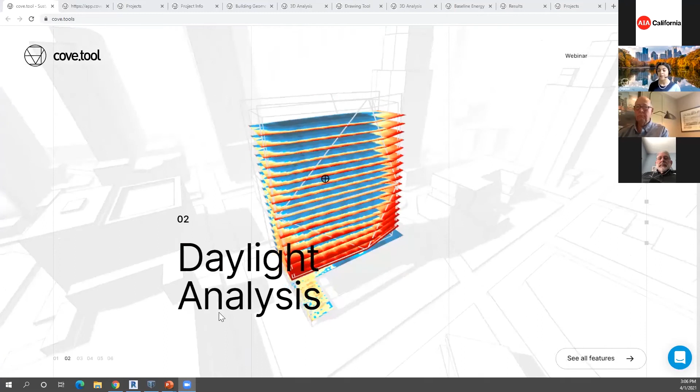And we'll be able to go through all of the various types of analysis within the next 20 to 30 minutes instead of something that would have typically taken 3 to 4 weeks. And not only will we run through the simulations, we'll run through what to do with this analysis, what to do with this information, how does it impact our design, and go through case studies that have done exactly that to see how it shaped those particular designs to give actionable information to your projects and pursuits.

Just in case that's not enough to get our juices flowing, owners are requiring this on pretty much most of their projects. In a survey conducted last year of 1,000 architects in the United States and Canada, it was revealed that a majority of RFPs and RFQs are now requiring building performance, are requiring sustainability to be some part of it. And of course, the easiest way to do it is to just start doing it so that we don't have to start figuring out how to incorporate building performance when we see the RFP, so that it can be a part of our workflow. We can already be prepared and we can go out and start pursuing some of those projects as well.

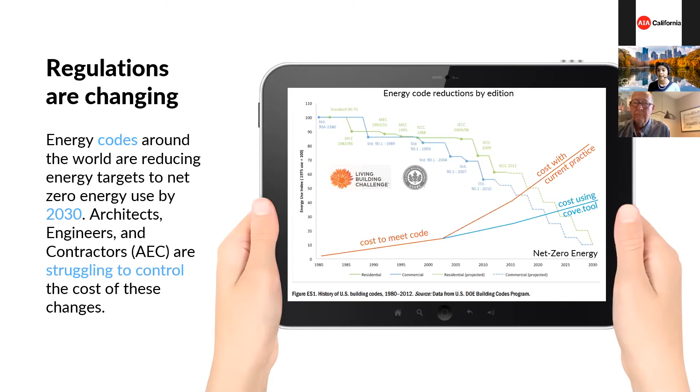Now, here's a typical design cycle. Everything from pre-design all the way to operations. As you can imagine, our ability to impact the cost and the building performance of any given project is really high up front. Nothing shocking there. Nothing is quite fixed. Nothing is quite set in stone. So we can change it easily. Of course, because we can change it easily, that also translates to cost of design changes. It's pretty low. Imagine having to make complete massing changes all the way at the 50% construction drawing phase. That's a very expensive change because we have to coordinate that across all the consultants, all the sub-consultants.

Despite the fact that that is the most expensive stage to make any design changes, that is where a lot of traditional building performance modeling happens, because it's not to inform the design, it's merely to hit a checkbox to see if we met it or didn't meet it. And if we didn't meet it, oh boy, the design changes and the cost of those changes, it's not cheap. Of course, with building performance modeling shifted earlier on, as we're going to see today, we can start making all of those decisions as early as pursuit, pre-design, concept design, schematic, so that by the time we make it to the construction drawing phase, there's no room for guesswork. We already know exactly where we're headed, and that increases our profitability by 6%. And when we're getting paid in a lump sum, which 2/3 of us are, that's a really, really big deal.

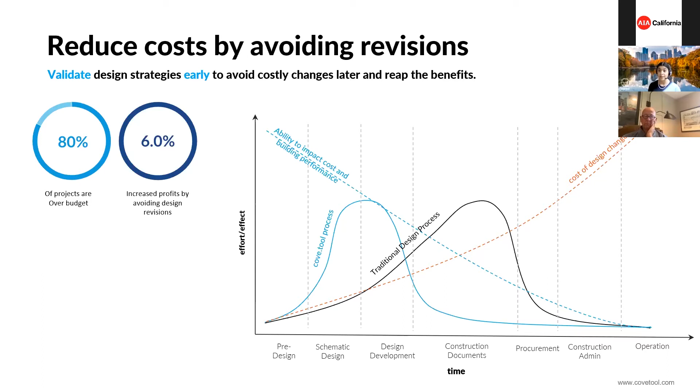Now, before creating cove.tool, I ran a successful sustainability consulting practice. And in this consulting practice, me and my team worked on just about every project type that you can imagine, everything from multifamily, labs, retail, healthcare, hospitality, single family, everything on the table. And what we realized was that no matter the project type or the project size, we always had to do a few core pieces of analysis to get started, to really make sure that the project was optimized for building performance. We always had to collect climate information so we could really understand the location that we were in. Always had to do some benchmarking so we could compare our project to the rest of the country or the rest of the world. We had to do some conceptual energy modeling so we could understand where our project landed in terms of that benchmarking, do parametric runs, and then follow that along with daylight, glare, shadow studies, carbon, water studies, so on and so forth, and pull everything together in a nice, easy to use report.

Whether you do some part of this, all of this, whether you have consultants that do this, no matter how you're handling this right now, it's a very time consuming process. And it took our clients anywhere from $32,000 to $38,000 for a simple 75,000 square foot building. Of course, in the next 20 minutes, we'll see how we can automate most of this and do all of this in about 20 minutes.

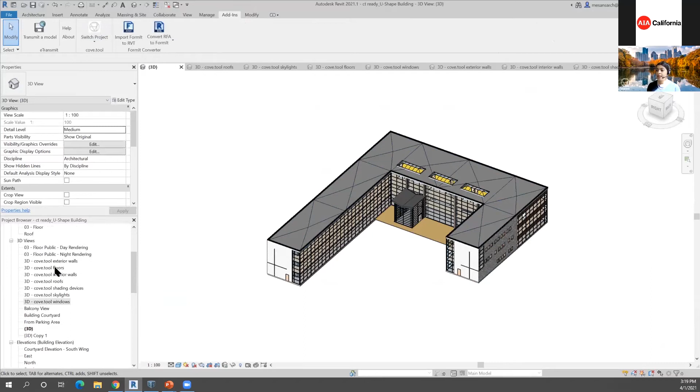If I wanted to bring in my model directly from Revit, for example, I could simply pop open the Revit file. Once the plugin is installed, hover on over to the actual plugin, select the correct project, click on the button, Create cove.tool Views, which creates these custom views in the 3D views category for all of the various elements that are critical for a good building performance model.

Key elements that are needed for a good building performance model are your roof elements, your wall elements, your floor, and your windows. That is the bare minimum, the items that we would have as early as the pre-design stages. Now, if we have more detail, if we have interior walls, if we have skylights, if we have shading devices, great. If we don't, there's no reason to wait.

There's never a reason to not do a performance model, because with every massing, with every fenestration that we're drawing, with every shading device that we're drawing, with every placement that we're doing, we're making a decision, and would rather use a data-driven way to make the decision instead of not.

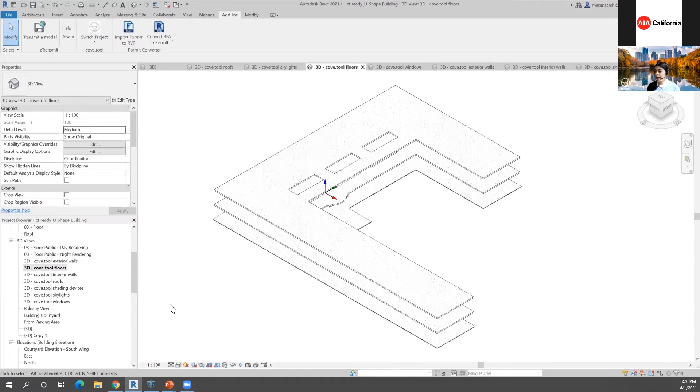If everything looks good, you're able to simply hit export all, and all of the geometry shows up directly in cove.tool. And we can see it right here as it's loaded up, and the 3D button is now active, and we can hit go to daylight. The moment I click that, it spins for a few minutes, and then it shows up.

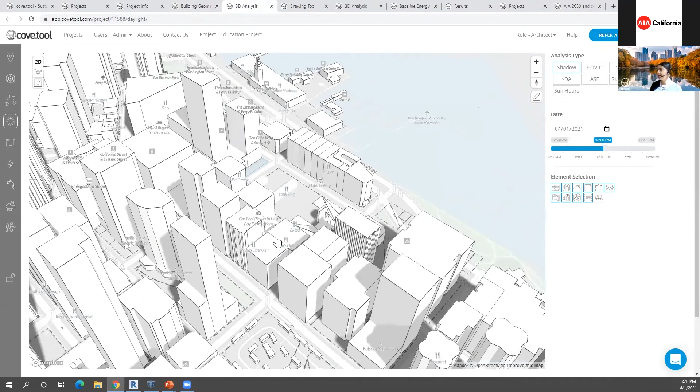As you can see here, we didn't model any of the context geometry, but it's all here. So here I am on that one site. I actually demoed an existing building to put my building that I brought in from Revit right here. You can use the edit icon to move or rotate your building, or to edit or remove any of the contextual buildings if you're demoing them as part of your design.

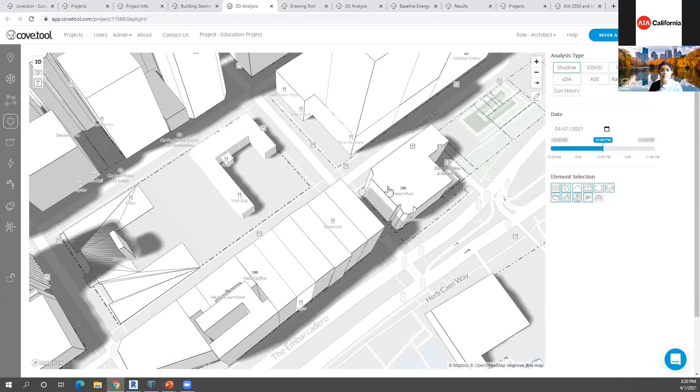You can also see that all of this urban context is auto-modeled. So if you've ever, like me in my previous life, outlined your context, extruded it, spent 8 to 12 hours getting a good context going, well, you no longer have to, because it's entirely automated. I'm going to go ahead and hide the text because I find it a little bit distracting.

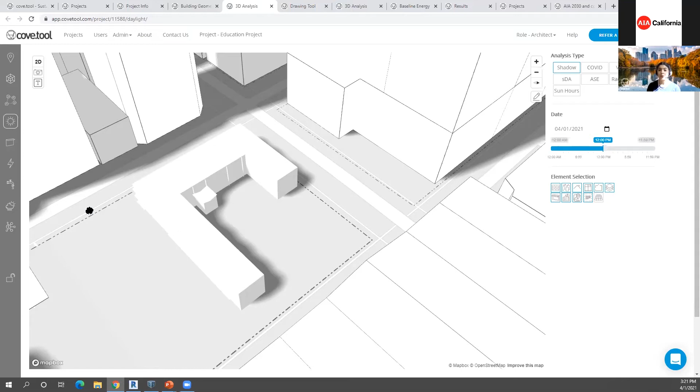I can see here is my project brought in, and here are all of the various analysis types. We're currently looking at shadow analysis. This analysis type is a key analysis type for pretty much every single design project. I would use it as a consultant or as a designer for a few different reasons. I'd use it to figure out how the shadow moves across the day, across the month, across the year, across my site, to understand what parts of my facade, what parts of my massing are going to be in shade, and what parts are going to be exposed.

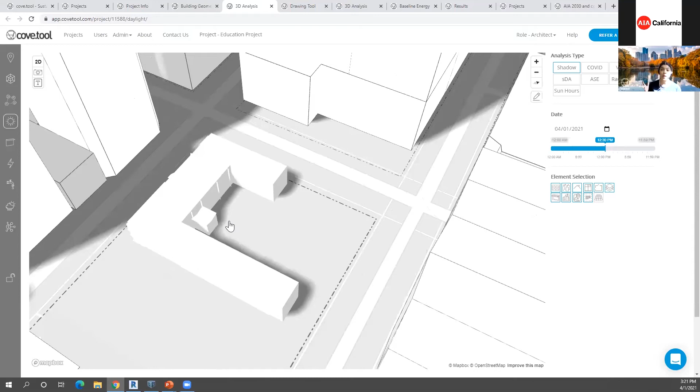It's also helpful to understand if I am planning perhaps an outdoor patio and I want it to be in sun, well, I can make sure that I don't put it in a place that's constantly shaded, like right here. So definitely an immensely helpful analysis type for just about every project. If I'm using this to tell a powerful design story, I can certainly move it to the time of the day that I want to set it at and hit the camera icon. The moment I hit the camera icon, we can download a high quality PNG for our use to introduce as part of our presentations or our presentation boards.

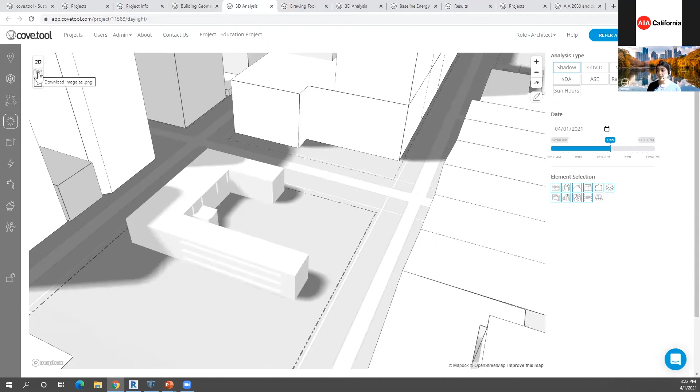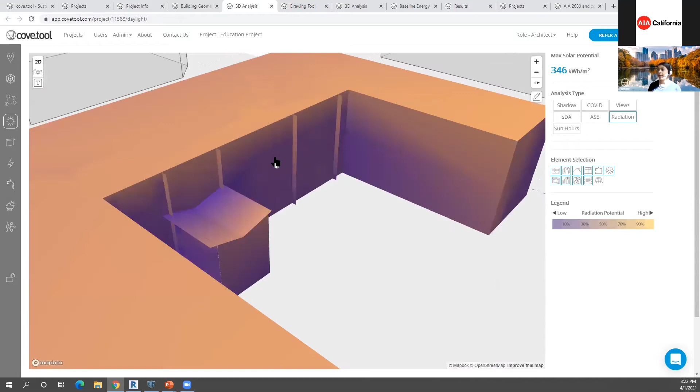Another type of analysis that I find immensely helpful is the radiation analysis. This is basically the maximum solar potential in kilowatt hours per square meter. So I can see right here how the sun falls in different parts of my building. I can see what parts of my facade have hot spots, if any. I can see where there's not enough access to solar and where there is access to solar.

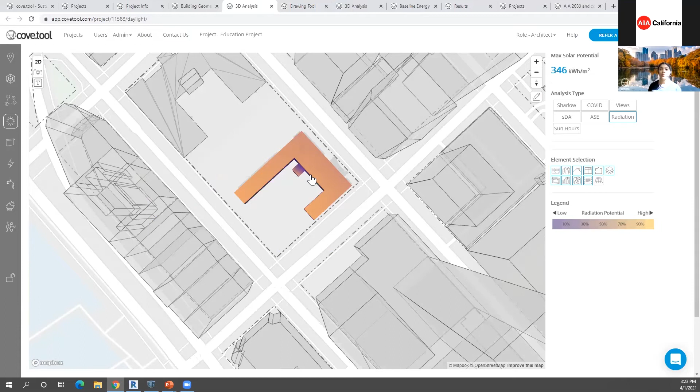As an example, if I was perhaps wanting to put some photovoltaic panels on my building, I would know that putting it here is just not a good idea because it's in shade for a good bit of the year from these buildings, and my solar potential is medium. It's not high. We don't have any part of the roof that has high solar potential because it is in such a dense urban context. However, these edges are definitely higher than kind of that middle zone. So it can help us really figure out and prioritize where we even want to put some of those solar panels and where they will even be effective from just a pure massing standpoint.

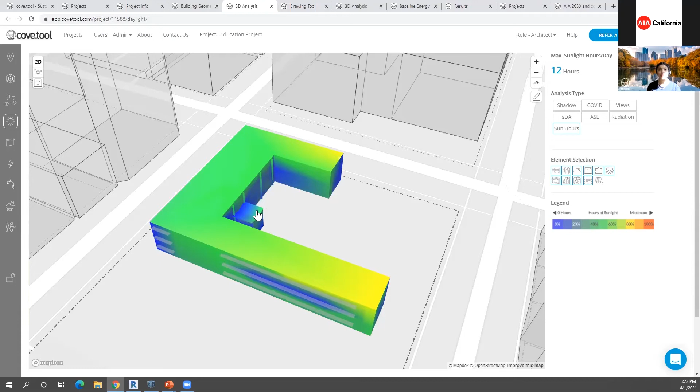Another analysis type and metric that is very helpful is the sun hours analysis. We can use it in a few different ways. We can use it to figure out which parts of the facade have access to daylight, since daylight is such a critical part of making sure that the occupants enjoy a space and experience it well. As you can see, I have tons of daylight falling on me. I can hardly be operational without good daylight, and that's true of a lot of people. So if we do have a fixed budget and we can only put in 30% window to wall ratio, we can make sure that we're optimizing it, that we're putting it in locations that even have access to sunlight hours.

Another way that I can use this particular analysis is, if I'm collaborating perhaps with the landscape designer, to make sure that we're only putting the right plant species on the roof. For example, this part of the roof only gets 6 hours a day of access to sun. So I'd only put species that are going to do well in that particular location type.

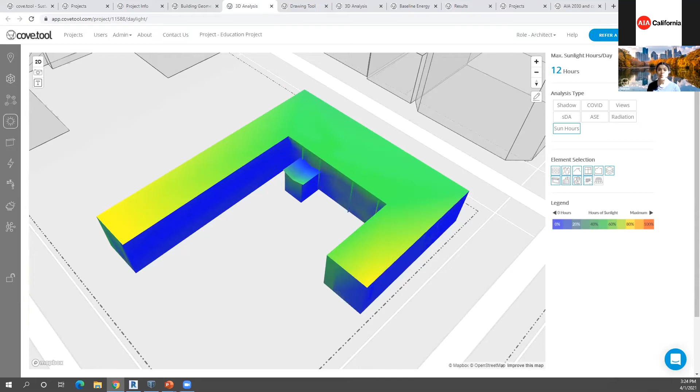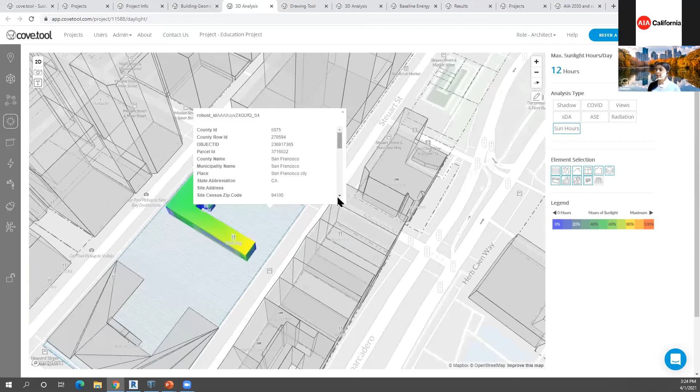Of course, if you're wanting to, again, introduce this as part of your overall story that you're telling, you can even hide certain context and just click a high quality PNG and get it going. Another aspect that's especially critical in early design is getting all of your zoning information. So you can see all of the property lines built in, along with the land value, who owns that land, what's the zoning for that location, all built in one easy to use location.

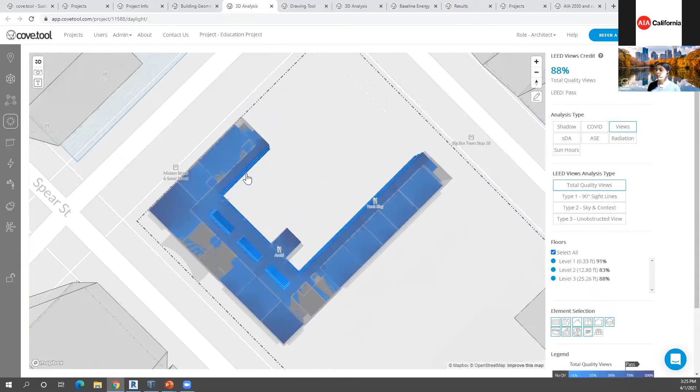One feature that I find especially helpful for design is views. So let's click on it and go to a 2D view. So we're on the top view and north is now facing up. So let's zoom into that and see what the view quality analysis type even means and how we can incorporate that for our projects.

Now, the view quality analysis type is especially helpful and especially critical for any building that we want to have high value in. Just like daylight, buildings that have high view quality, that have a good view where people can see out, typically also have a higher real estate value. Imagine even multifamily apartments that have a good view to the outside rent for more. Hotel rooms that have views to the outside rent for more. Mountain view or pool view are always priced higher. The same translates across many other building types.

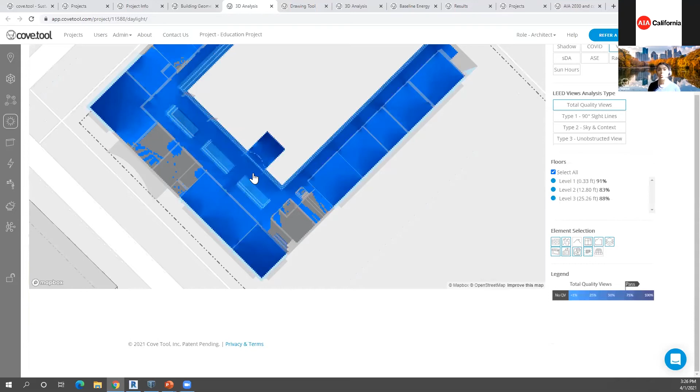So you can actually see the deeper the blue, the better the view. If it's gray, it doesn't have any view at all, just in terms of these metrics. Of course, if this is also a project that's pursuing certifications like the LEED certification, you can see whether it would pass or fail the credit. In this case, we would get that point for LEED views.

The views are composed of three different view types: sightlines, context, and unobstructed. And you can see each of those and also look at it floor by floor to see exactly where you need to modify things. Perhaps you need to add some additional windows. Perhaps you need to put the desks, if this is an office space, where there is a view.

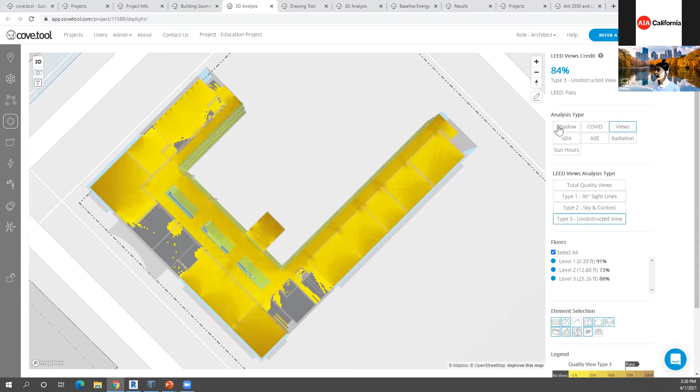Another type of analysis that you can see right here is the daylighting analysis. This is the spatial daylight autonomy, basically the quantity of daylight. Orange is good, blue is not so good. And we can see from right here what the daylight penetration looks like. So we don't have a whole lot of daylight coming back here, even though we have pretty good daylight penetration at the front. We can see that on a floor by floor level, and we can see our overall 33% SDA. The minimum required SDA as defined by some of the benchmarks is 50%. So this building is not doing too well in terms of daylight.

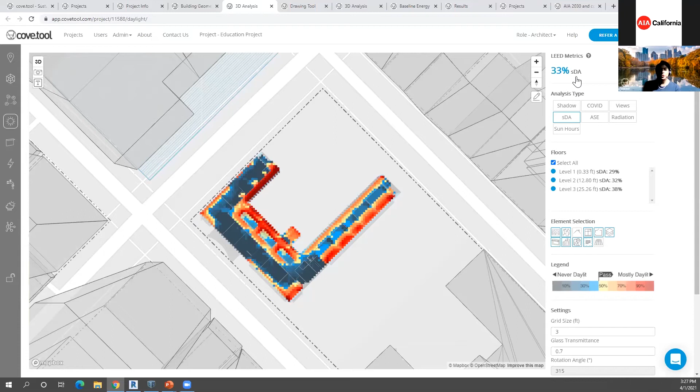So if we catch that early on in our massing stages, in our schematic design phases, well, we can fix that. We can add more glazing. We can make sure that the glazing that we have is oriented appropriately.

Another analysis that's especially critical, and a metric that we should all just know and have at our fingertips, is the ASE. This is the annual solar exposure. It basically is the number of hours a particular part of the floor plate has over 1,000 lux, which is considered too much glare, for more than 10%. So we can see right here, yellow is considered okay, green is great. So we do have some glare-related challenges right here on the southeast.

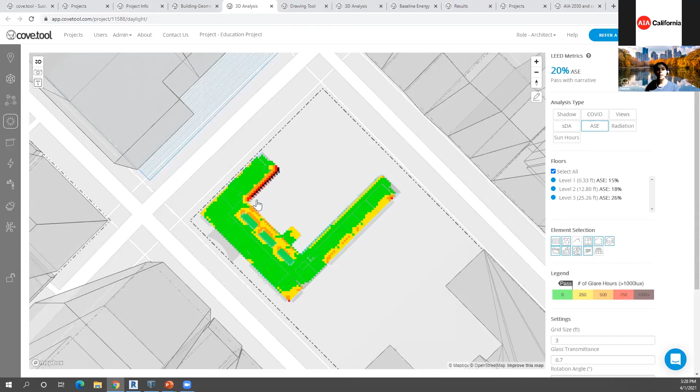So if we did want to make sure that our facade was optimized, well, we wouldn't put shading devices everywhere. And if I had to, again, manage a really tight budget, I would know that from a shading standpoint, my priority number 1 is this facade right here. Priority number 2 is that facade because it has some mustard, the deep yellow color. Priority number 3, this facade right here. And then everything else can basically get away without having any shading devices at all. So really, really helpful to have that information built into your design process.

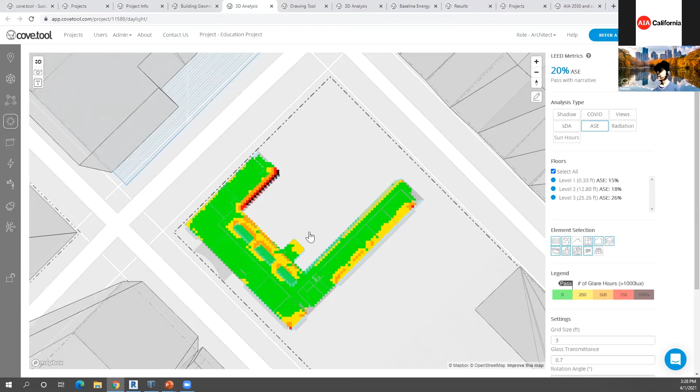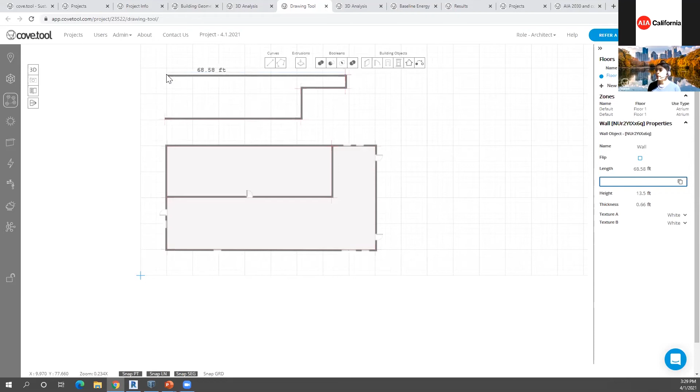Now, if we didn't have a 3D model, we could have also drawn it. So right here, we had two opportunities. We can go to the drawing tool, which is exactly what this is, where you can draw your geometry from scratch to at least get your high level massing going. I can go ahead and draw all kinds of walls and shapes to really start representing my geometry well. This doesn't look like a good mass, but hopefully you'll draw a mass that makes a whole lot more sense than this one did. And you can add doors and windows and openings. And just in case you don't already have a 3D model and you're just getting started, really in that thought phase, you can certainly use the drawing feature to draw and represent your massing.

Once we've done all of the analysis, we can move on to understanding the energy use intensity for our project. This is a quick glance at what the whole building EUI is. We talked about EUI as a core metric, right? Energy use intensity. We can see how many potential LEED points it will get. In this case, none. We can see exactly what the operational carbon reduction is for this project. In this case, we're reducing it by 82%, which is really fantastic. And we can see benchmarking, what a baseline building of this would be like, where we're at, and what the 2030 target is.

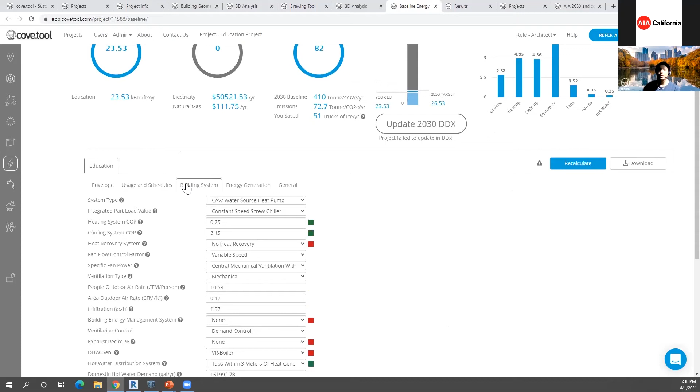So in this case, we have achieved the 2030 target with some of the modifications that we've made. All of these inputs right here. Of course, we can collaborate with mechanical engineers and consultants who are invited to the project, but it gives you a really fantastic starting point because it's automated for your local regulations. At this point, I can go ahead and hit create report and get an automatic PDF report created for me.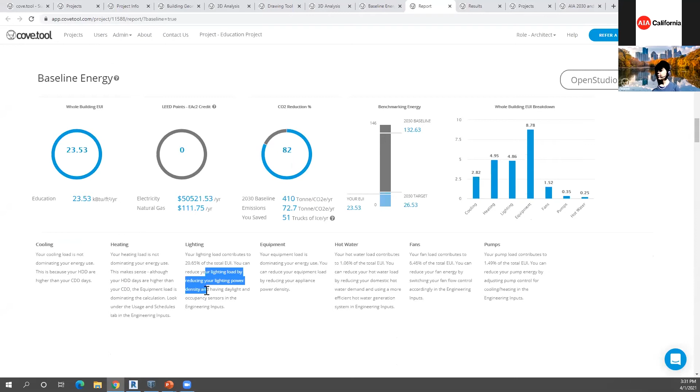It tells me what the benchmarks are for national averages for my baseline and targets for energy, daylight, and glare. It showcases all of the energy analysis for me. It also tells me personalized recommendations of exactly what I can do to push my building's energy use even lower. I can see all of the water use analysis as well for indoor, outdoor, and stormwater usage, something I haven't even touched on yet. I can also see the 2030 palette case studies. These are all location adjusted and building type adjusted for your project.

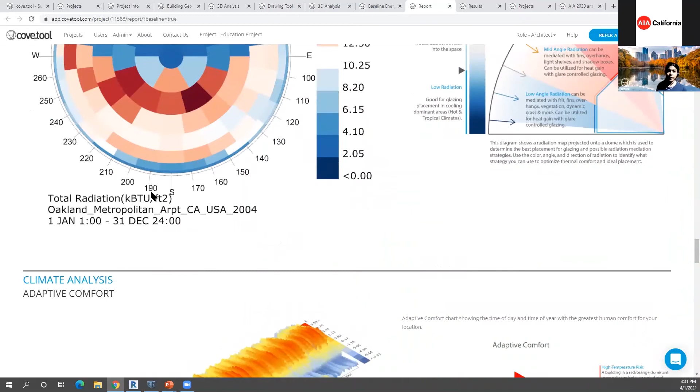A really, really great way to present some strategies to your clients and owners in charrettes, in early meetings, to make sure that everybody is definitely aligned on strategy and on the same page in what some of the things that can work for the project. All of the climate analysis pulled together along with good action items and next steps. For example, the psychrometric chart tells us right here that 3% of the time is comfortable without any passive strategies. However, if we add some internal heat gain, we can increase our comfort by 60%. So we want to attract all that heat for the San Francisco climate.

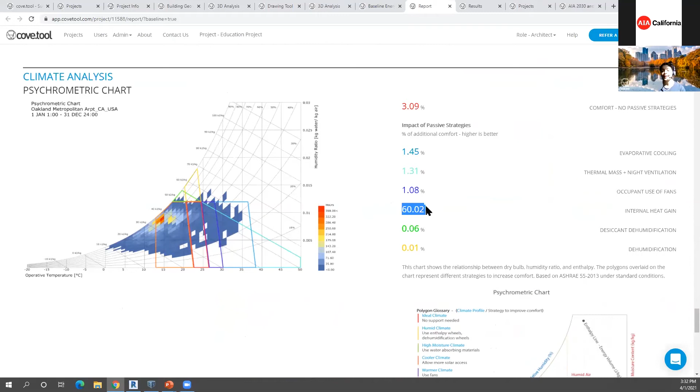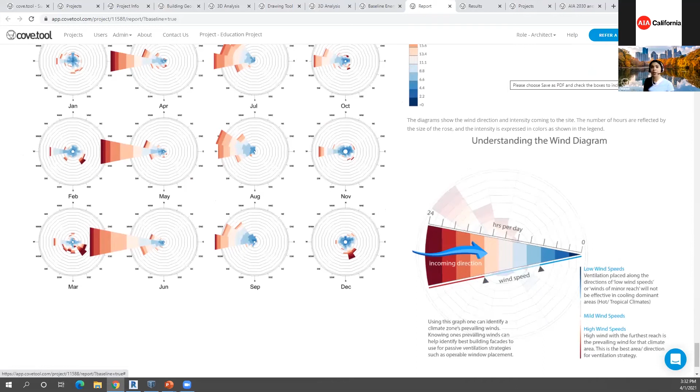All of the climate wind analysis broken out by the month. I can download the PDF and go ahead and add my firm colors, my firm logos, and really be on my way. While all of this is absolutely fantastic, perhaps you want to take it to the next level and do a really detailed energy model with your energy consultants.

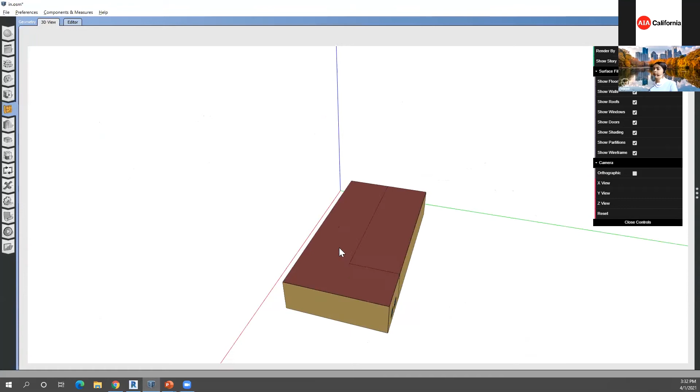You're able to hit the OpenStudio Export, which will give you a compliance-ready energy model that you can modify with your energy consultants, with your mechanical engineers, where the same model that you've drawn as architects will open up in the software that they use for detailed energy modeling as well. So again, saving everybody on the team tons and tons of time, easily 60 to 120 hours of remodeling time that I've personally spent on my team.

Once we've done all of this, we can of course take a quick peek at the water use studies as well, just like I pointed out, and test out low flow fixtures. Maybe it's not quite that low flow. Perhaps gray water got scrapped from the project. We can remove it. We can understand how much water we'll be using from an irrigation standpoint. Maybe instead of native plants, we want to use garden agriculture, see what that does to our water use. Maybe we want to use some sprinklers, see what that does to our water use, so we can really tie the entire design together.

The goal and the benefit that you have from having an integrated workflow with your entire team is, for example, if your design has great daylight, you'll see that your design will use less lighting energy load because it's all connected. If you're using low flow fixtures for your water use intensity, you'll see that in your overall domestic hot water usage, the amount of energy it takes to heat up the water is lower because it essentially is less water. Some of these things never get coordinated or matched because everybody is kind of working in their unique silos. So just bringing everybody together using the same basis of design really helps alleviate that.

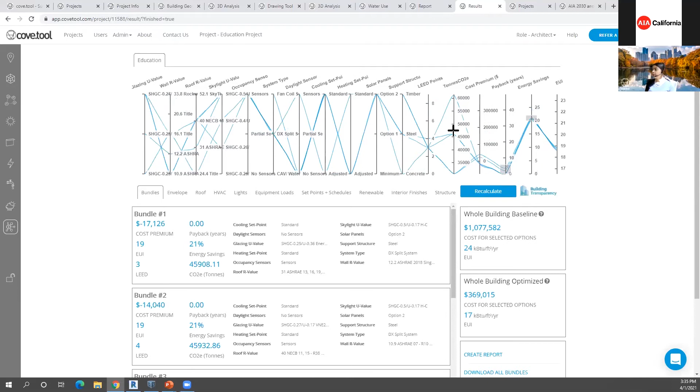So for example, if we're working on a project and the owner tells us to take out any options that are more than 5 years of payback, we can simply do that. We will remove all options that are more than 5 years of payback. Now within this, if we want to get to at least 20% energy savings, we can see the options that remain. Within those, if we're wanting to get to a medium or low embodied carbon, we can see the absolute lowest cost way to be able to do that.

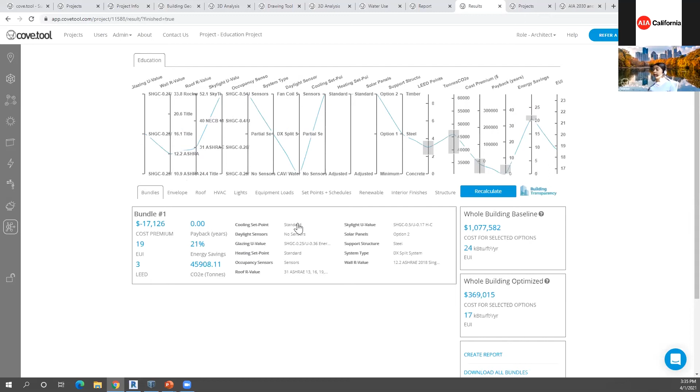So we can actually save $17,000 from base minimum while hitting 21% energy savings. And it tells us exactly how to do that. For example, in this case, it's telling us to not spend any more money on the walls. It's telling us to use this code minimum glass. It is telling us to upgrade our roof and upgrade our mechanical systems, along with adding some solar panels. So that seems to be the best way out.

So look for the scenarios that make most sense to you, that are relevant to your project, and you'll be able to optimize your particular project as well. Now, you can customize exactly what these options are by simply hovering over these tabs, and you can simply add and remove options. You can create custom options or select from a drop-down list.

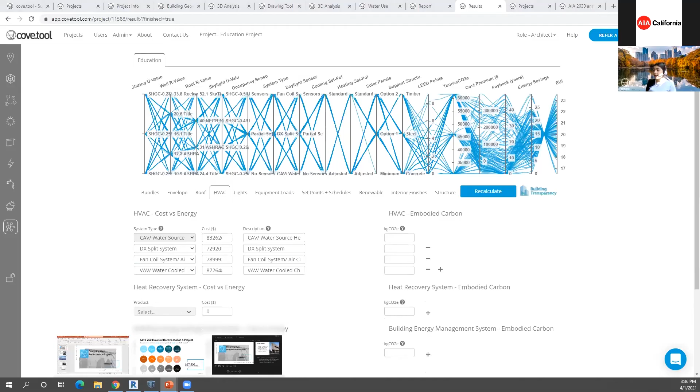This is exactly the process that this particular team did for the third classroom and engineering building. This is a University System of Maryland project designed by Cooper Carry architects and AEI engineers. It's a 75,000 square foot building composed of classroom, lab, and dining building. This particular project, which we can see the rendering in the background, courtesy of Cooper Carry, had pretty good performance goals. They wanted to do 30% better than industry benchmarks. They set up realistic performance goals that they were definitely going to try to hit.

They wanted to have daylight over 55% of spatial daylight autonomy. So that basically means over 55% of the floor plate could operate without any electrical lighting. They wanted to have glare under 10% to make sure that less than 10% of their floor plate would have glare-related challenges. Again, just goals to make sure that the building was going to pursue and be a high-performance building that occupants would enjoy being in.

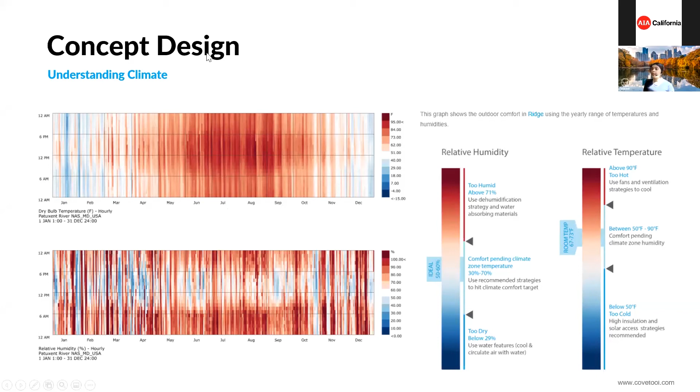Now, for this lab project, the design team started with understanding the climate a little bit better by using all of these climate analyses, as we just saw how to run them. They were utilizing this in the concept design phase to understand what the climate was, understand which passive strategies were even going to work for this particular project. For example, again, internal heat gain was going to be a big one, along with dehumidification for this particular project because it's in Maryland, so it made a big difference.

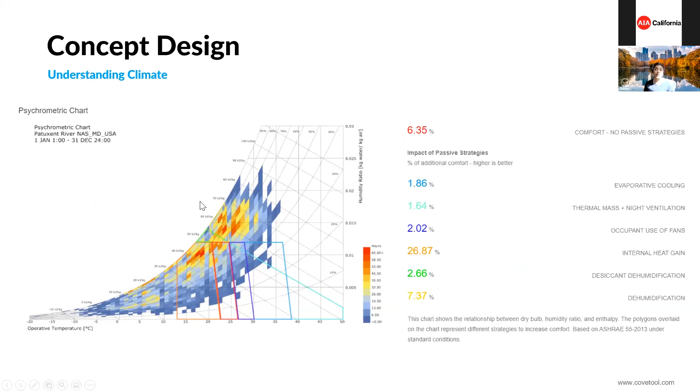Understanding the benchmarking was core to this particular design team because they wanted to make sure the targets they laid out were realistic. So the national average was 100 EUI for this project. This team wanted to get to 60 to 70 EUI, even though the 2030 target was 30.

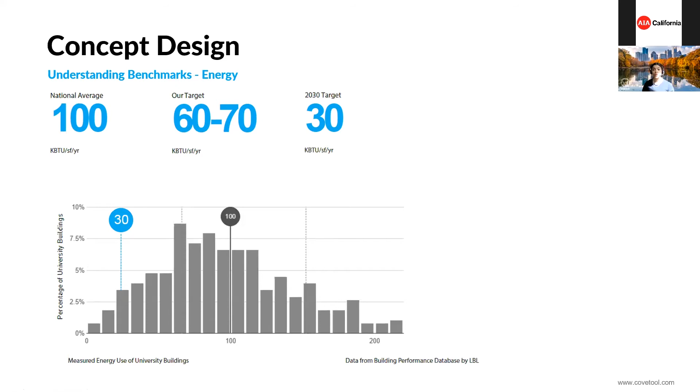They consolidated that with the feedback from the ownership team that wanted to definitely move away from just hitting a national average, but were definitely not in a position to be ambitious enough to go as low as the 2030 targets. Of course, completely possible, completely valid, but sometimes we just have to pick and choose which clients we can push that far with us to help solve this climate change problem. They were able to also look at the benchmarking for daylight and glare and set some of those targets.

Then came the schematic design phase. This particular design team was very iterative. They did tons and tons of sketches, tons and tons of designs, tons and tons of overviews. As you can see, there's a whole range of different design schemes. Each of these are different plan views, different organization on how they could put the same program elements on the site to figure out the best way to do that.

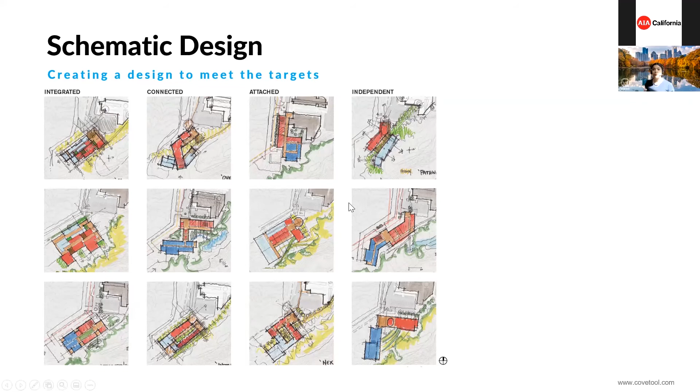With every design scheme for every single design meeting, the team always presented an energy and a daylight number as well, in addition to what it meant in terms of aesthetics, what it meant in terms of some of the other core elements, the zoning, the site, the master planning, but also energy and daylight. Other teams have taken this a step further and built in views because it's right there.

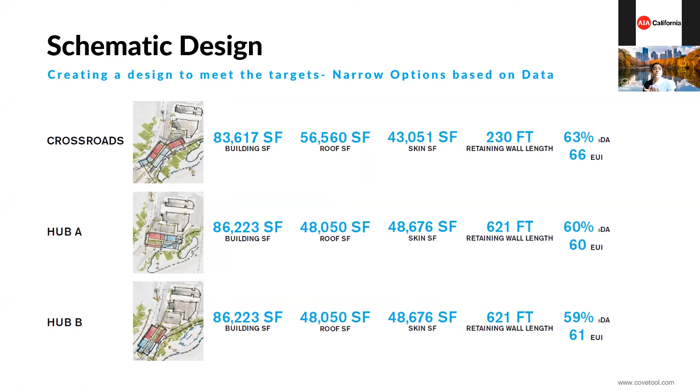It's so easy to do. Or even radiation mapping to see how that compares, or shadow mapping to see how that compares. But this team made sure that there was no design meeting where design options were being considered where the holistic picture was not presented. So when they showed this to the actual owners, it was quite obvious that option 2 is the best performance in terms of energy.

We can see it's got the lowest energy use. Even though it's got a pretty okay daylight, it's not got the best daylight, it's not got the worst daylight. So it was immediately obvious that option 1 was just not going to work. So that was easy to leave out. Then it came between option 2 and 3.

And because daylighting was such a core part of this particular design team and the design aesthetic and what the ownership was trying to do, they went with option 3, knowing that it was a little bit more energy, but they knew that at schematic design so that they could use the remainder of the design phases to make sure that they can balance it out. Information is key. Information is what helps us make good decisions.

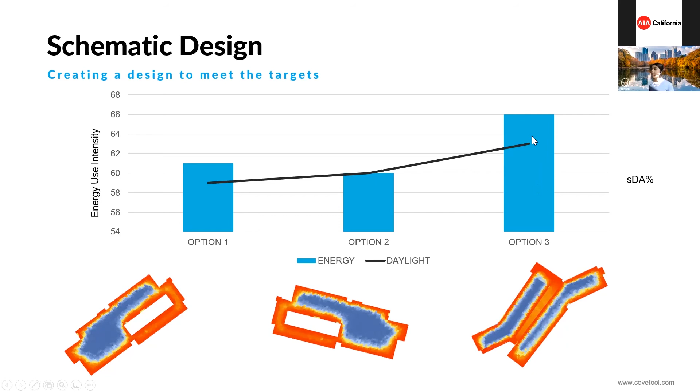So they knew that they were going to have some energy challenges, so they definitely needed to balance those, but they would have a much higher exposure to daylight, which was a key deciding factor. So they went with this particular design scheme and then moved on to the optimization phase for design development. They looked at 3 different types of roof options.

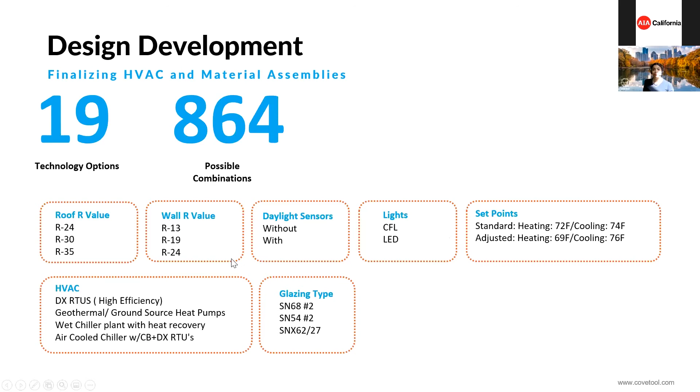These three different SHGCs, all of these three different glass products from different manufacturers, different wall assembly options, sensors, lighting types, set points, different mechanical systems, and all of these together are 864 possible combinations. There is no way that a particular team can study that many options manually and still meet the budget and still make a profit or even break even on any given project.

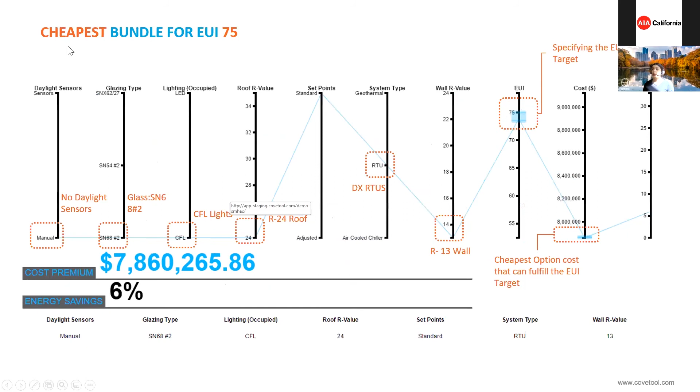So they used the optimization just like we saw. They used sliders to find the cheapest way, the lowest cost way to get to an EUI of 75, the lowest cost way to get to 65, and the lowest cost way to get to 55. Once they did that, they were able to present those options, showcase those options to the ownership team who was able to decide for the lowest cost option to get to 55.

They were able to get that buy-in from the ownership team because that was part of their original pursuit. That was part of their original design. They kept the continuity through so that there was no room for being surprised and everybody was bought into the same mission and had the same goals for the actual project.

Holistically, this design team could have easily spent 235 hours or $32,000 on doing all of the analysis that we just saw. But of course, with the optimization, they spent 3 hours in concept design, 4 hours in schematic design, 2 hours in design development, and 1 hour in construction drawing phase, bringing it to a sum total of 10 hours per project, with their average billable time being at 150. That was $1,500 a project.

No matter how big or small our project is, every project can afford 10 hours of billable time to make sure that our entire building performance, holistic building performance strategy is all tapped in and is all ready to go, which is exactly why we get to do this, not for that one elite, one special project where we have budget for it, but on 100% of our projects, which is exactly what we need to do to fight our existential crisis of climate change.

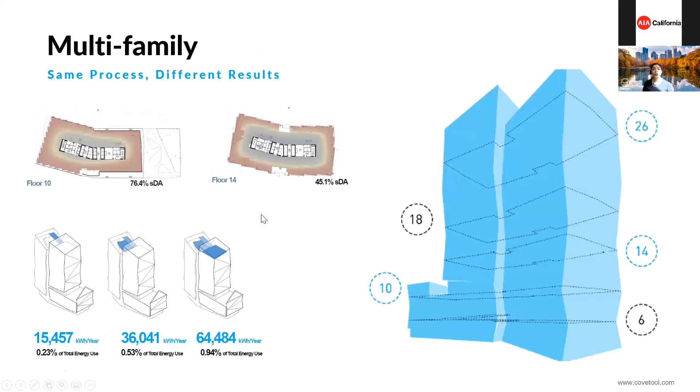The same process applies to every single building type, and that's exactly what we see with our users on the platform, whether it's new construction or renovation projects, whether it's a multifamily or a single family, whether it's labs or it's healthcare. We can all go ahead and start incorporating a lot of these strategies directly into our designs.

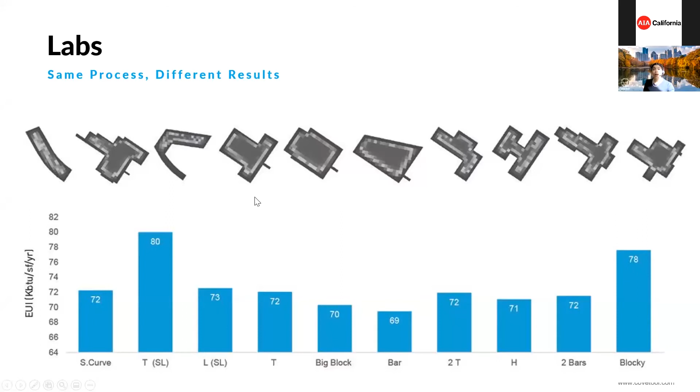That's a little bit high level of some of the information that I brought with me to showcase to all of you today. There's a few things that I'm happy to showcase still, but I definitely want to make sure I leave time to answer some of the questions that have come in. So I'm going to pop open these questions so I can start answering some of them.

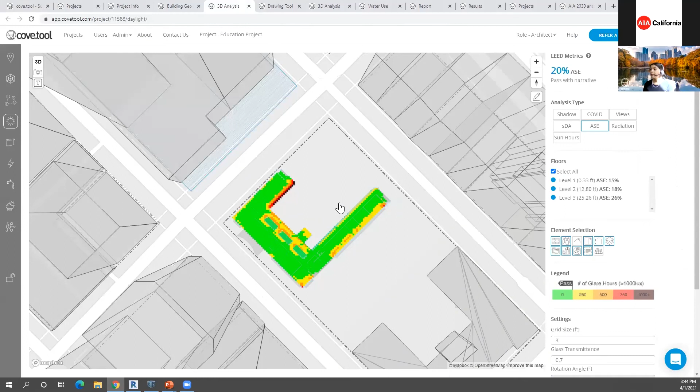For example, right here, if this is where I left it at and I exit out of this project, or I invite a team member to collaborate with me on the same project, this is exactly the view that they will see too. However, if I'm also collaborating with my team member, which I am invariably for every single project, I can also just lock the project so that they can't make changes to it, which also makes the process much, much easier. Hopefully I was able to answer your question.

Another question that came up was, does that work for Revit LT too? I do not believe it works for Revit LT. I can talk a little bit more about the versions that are supported as part of the App Store. So here we are on the App Store, where there's a whole range of different types of plugins that are available. Everything from SketchUp, Rhinoceros, Revit, Grasshopper, Blender, BIM, ArchiCAD, Giraffe, Vectorworks, AutoCase, so on and so forth.

So it plugs in with all of those, and Revit in particular, since that's what the question was about, works with a whole range of different compatible versions. You can download the latest version of each plugin also directly from the App Store.

Another question that came up was, does it have heat island effect analysis? You are definitely able to modify the reflectance of your materiality to make sure that you're incorporating the heat island effect, and it is very well part of the entire picture because it gets your context automatically and it understands your local weather conditions automatically as well. So you can change the reflectance values and see the effect on that in terms of the heat island effect as well.

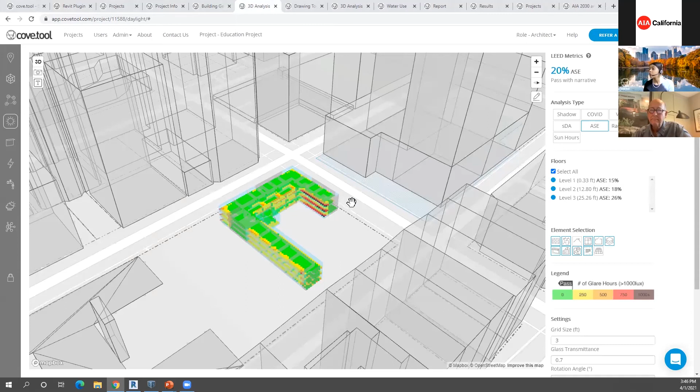Another question that came up was, how does cove.tool determine the quality of a view? Example, view of a landscape, water versus window facing a utility yard. Great question. It doesn't. It just tells you if you can see anything to the outside. However, a designer can add an extra layer to it, and perhaps this view is to some trash cans or a utility. I certainly hope not, because it's prime real estate next to the marina. But if that was the case, you certainly could rate that yourselves.

What it does do is it tells you, do you even have a view? Can you see out? Is it blocked by something? Is there a building right in front of it so you can't look too far? Or, is the window too small that humans can't even look out of it? That's the analysis it does. However, you're able to go in and further use this and say, all of our elite views or views to the mountain are deep yellow. That means they are able to look out, instead of all of the mountain views being the gray non-view zones.

Another question that came up was, I'm curious how your tool compares to competitors' tools if they exist. The key competitor, in my opinion, as I realized when we started developing cove.tool, is truly just doing all of this manually, which you can. You can do a bunch of these pieces of analysis in 5 to 6 different platforms, and it would take you about 250 hours to do it. There's really no way to do view analysis, which we're on right now, unless you're a scripter and an experienced Grasshopper modeler, which again, there's not that many of.

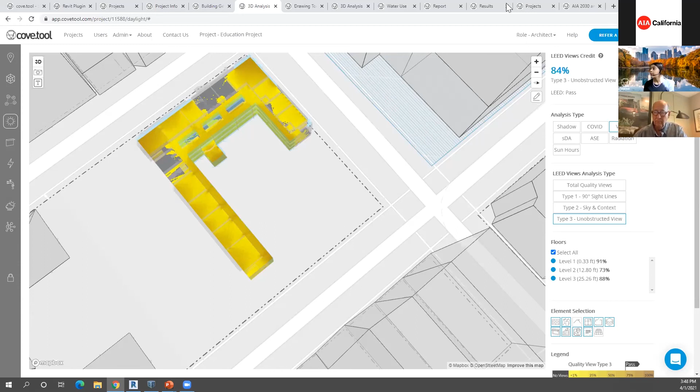But it really does provide accessibility, saves you tons of time, and allows you to do unique analysis types that don't exist even in any of the 5 to 6 different platforms that you can pull together to do some of this work. The same is true for the optimization. None of this analysis type is available in just about anything else. You would have had to do it manually, again, and spend tons of time.

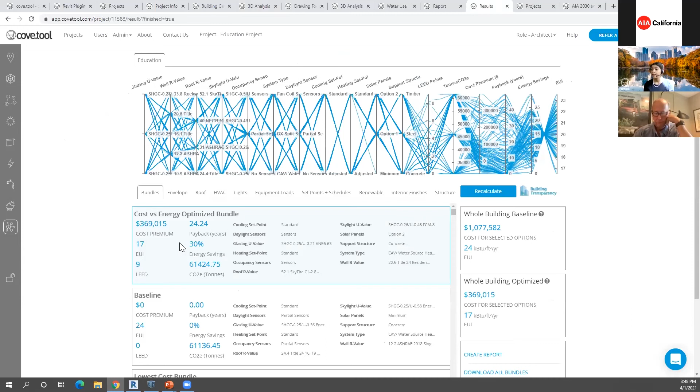Another question that came up was, what is used to calculate the cost-benefit analysis? So the cost versus energy optimization is done for the elements that you define. So this is our parametric studies, where you can go in and, for example, for wall, I can define multiple different types of wall. I can do so from a drop-down, select a product, it updates the R value, it adds the cost information, which is provided to us by the manufacturers and then location adjusted for you depending on where your project is, and also the embodied carbon value, which is pulled in directly from the EC3 database.

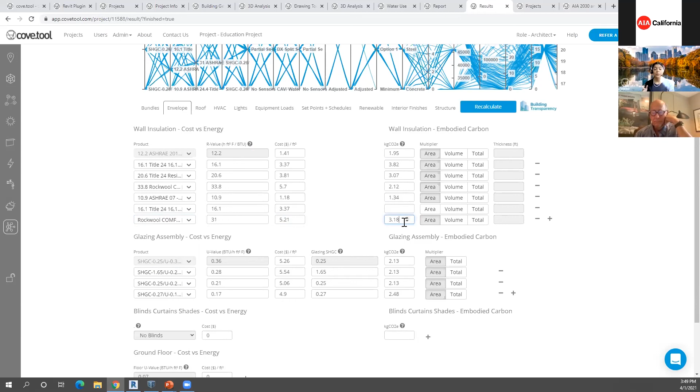Again, if you have a cost estimator on your project, or perhaps if you have better, more project-specific cost data, you can simply modify this. Maybe this is $7. You can completely change that to match the needs of your particular project. Once you've defined all of these, you're able to hit recalculate, and it's able to run through every iteration to find out the lowest cost way. It's running the machine learning algorithm to find the lowest cost way to hit your performance targets.

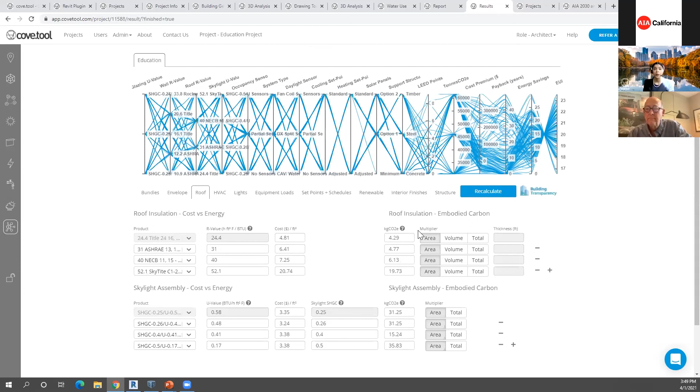Another question that came up was, does it evaluate internal voids as well, such as courtyards? Absolutely. If it's an opening, if it's modeled accurately in a 3D model, you're very well able to do that as well.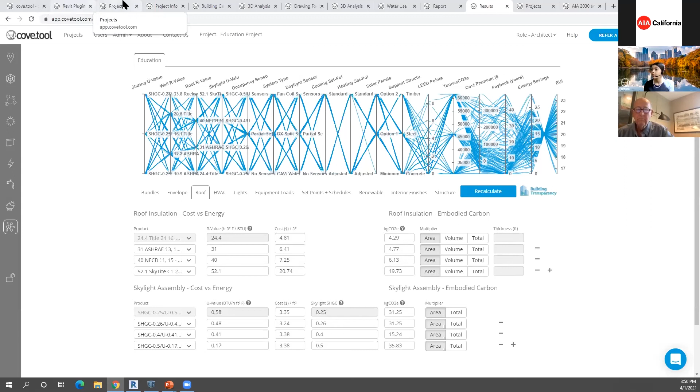Another question that came up was, is there an educational/student version available? We do offer a whole year of complimentary licenses for all academic work for students. Let me actually show you the steps for any of the students that may be online. You can hit buy now. And I know that students are not buying it, but you can go right here. There we go. The student professor license, there's an application, you can fill it out and you can get your student access or your professor access. It is being taught in over 200 universities as we speak, so there's tons of students and professors that are already on the platform.

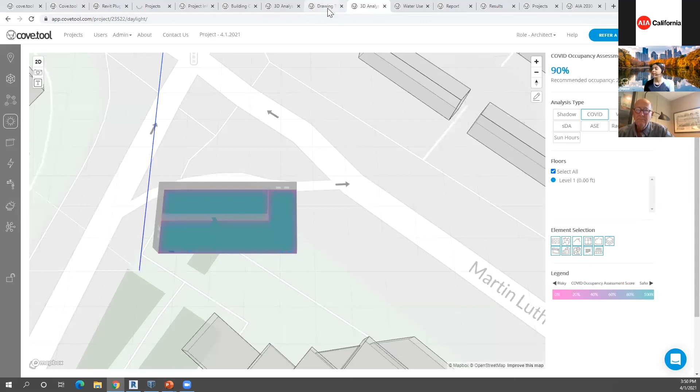Another question that came up was, what is the COVID analysis type? Here's the simple geometry that I modeled in the drawing tool. So maybe you'll draw something a little bit better than me. This particular analysis type helps us figure out how much of the floor plate is able to maintain 6-foot social distancing. And for every analysis type similar to this one, you can actually click on the question mark and hit learn more, which brings us back to our internal help center, our Google for building performance, which describes to us exactly what this analysis type even is.

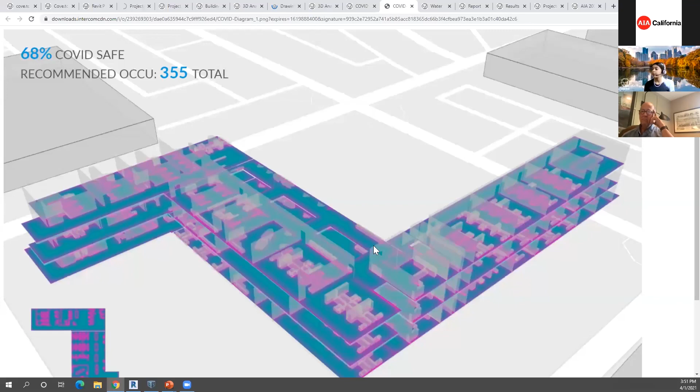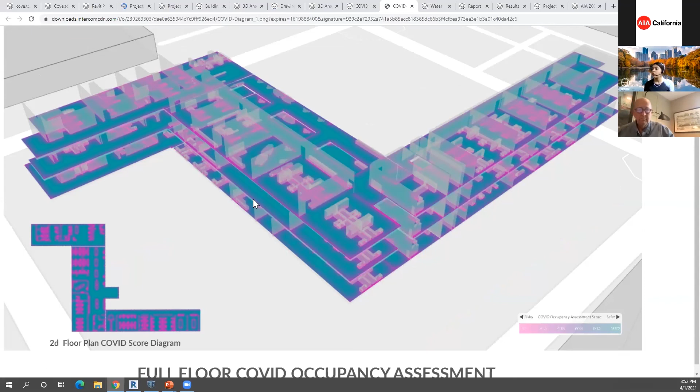For example, this is taken directly from the AIA reoccupancy assessment tool and the LEED safety pilot credit. It walks through the exact calculation methodology along with giving some of the obstruction calculations and case studies. For example, here's how one office building used it. They brought in all of their furniture as well using the interior wall layer under Revit, and they were able to see that the current furniture layout was just not going to fly because people weren't going to be able to meet their 6-foot social distancing requirement as recommended by CDC. And they knew that for the same space where they could once hold over 550 people, they can now only hold 355 people.

So it also updates your occupancy calculations along with giving you a gradient in terms of risky to safe. The same analysis type can be used for restaurants to figure out the walkways, or classrooms to figure out how many students you can safely fit in a given classroom. For this classroom, option C is the best one, because we did A versus B versus C. It could once have up to 18 students, but can now support only 7.

Another question that came up was, what liability does cove.tool have for errors in data calculations? cove.tool carries the same liability for errors in data calculation like any other building performance analysis tool. To put it even more explicitly, none. That is true of the entire building performance analysis space and industry, because it's really hard to predict how a building is going to be built.

I might put in cove.tool that my building will operate 8 a.m. to 5 p.m. and I'll have 50 people, but perhaps when it's operational, maybe Bob or Rob or somebody else wants to work till 9 p.m. every day and leaves the lights on, and it just throws off our energy use. Maybe when it was getting built, a little infiltration, like a hole got left, or a part of insulation got left, which happens all the time. And for that reason, this is true of not just cove.tool, this is true of every single building performance platform that exists in the world today.

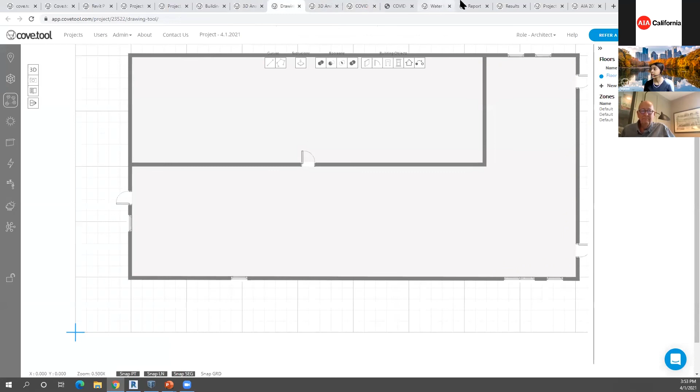Another question that came up was, does 2030 DDX recognize cove.tool as a modeling engine? It certainly does. You're not only able to model, you can auto report. So as part of every single project, gosh, I have so many screens open, there we go. You can actually report your projects directly to the AIA 2030 by simply clicking the 2030 icon, and it goes and reports automatically, and it is completely recognized by the DDX. We're also listed on the DDX website.

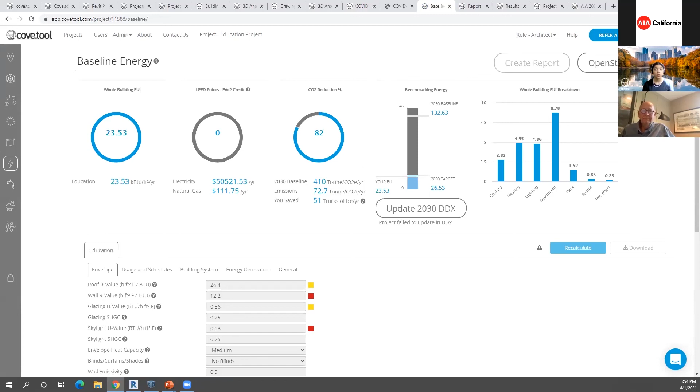Another question that came up was, many energy simulation programs have difficulty with modeling passive solar impact. Projections are usually pretty good, but internal gains are more challenging to model accurately. Any innovation with cove.tool on this? So cove.tool definitely uses the heat balance systems, and you're completely able to modify all of your internal gains as well, but it still uses the heat balance methodology, which is used by platforms like EnergyPlus or eQuest.

The benefit of cove.tool, however, is that because it is a smart platform and we have over 10,000 users modeling 15,000 projects as of now, we're able to learn from all of our users. For example, if there are certain use types, if there are certain inputs that are more prevalent in a location, we're able to learn from it. We're able to make sure that the platform actually keeps getting better with more usage instead of staying stagnant, which is true of pretty much every single legacy platform. Hopefully that answered your question.

So that sounds like the end of the questions there, Sandeep, huh? It certainly does. There were a couple in the chat box. Angela had her hand raised and Stephen had a question. Angela, did you still have one?